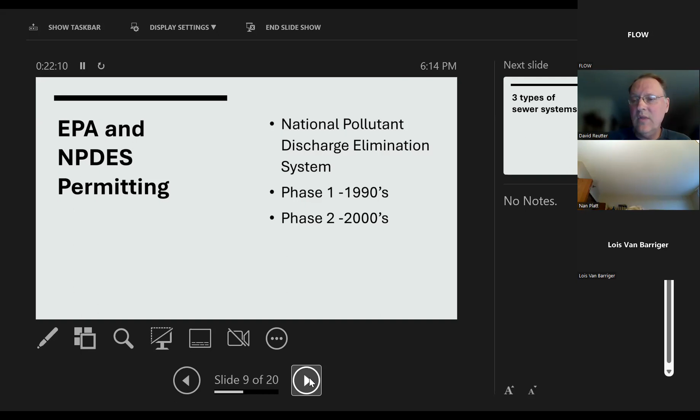Minimum control measures, like I said, there are 6 of them. You've got public education and outreach. You've got what's called IDDE, illicit discharge detection and elimination. Public participation. You've got construction and post-construction monitoring for any new development. And then there's MCM6, which is good housekeeping - for municipalities in how they run their own in-house systems. They want to be the model of good stormwater protection and prevention, and that's what 6 is all about.

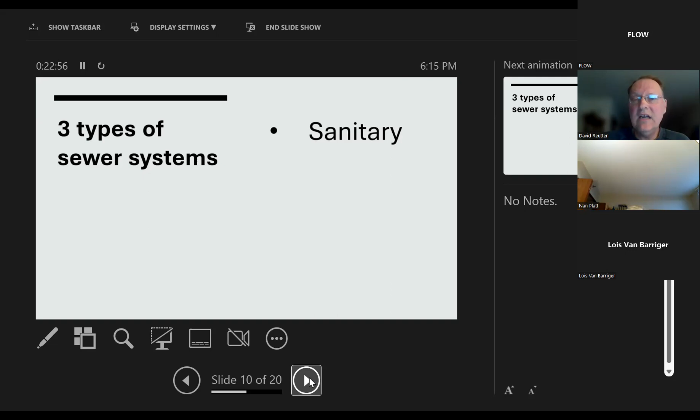So let's get into what types of sewer systems there are. You've got 3 different types. There's sanitary - when you think of sanitary, it's everything in the house that's piped out and going to the sanitary system, hopefully. That's something we oftentimes run into, is it's not going to the sanitary. You've got home septic treatment systems - most of those are hooked up to a septic field or a mound system, or they have discharging systems that discharge possibly to the MS4. So those sanitary systems are different than what we call the storm system.

Storm system is just what it sounds like. When there's a storm and rainfall and runoff, that's what flows into those storm systems and takes whatever it flushes with it directly to the streams, most likely. Only recently have we begun to do stormwater facilities that treat that - that's when you see the big stormwater ponds around development.

Not all ponds are stormwater related. Some of them are simply decorative. Some of them are dug for soil - they need the fill for the site, so they'll dig a hole and create a water feature and use that fill for the land. So not all ponds are storm related, but many of them are when you see new development go in these days. That's only been around since the 90s.

It was a suggestion to have stormwater controls. By the 2000s, it really was part of the construction permits to be doing stormwater control in some form.

Then we have combined systems, and it's just what it sounds like - sanitary and storm combined. This was something that with the NPDES permit in the phase 1 and 2 communities, the combined sewers were a big problem. This is where you see a lot of the older US cities having combined systems in some form, and all of these were given consent orders to meet the federal permit requirements. So you've seen a lot of big sewer projects around the country to try to stem this combined sewer system issue. Philadelphia has had big issues there because all of their old sewer systems go back to that Roman type of system.

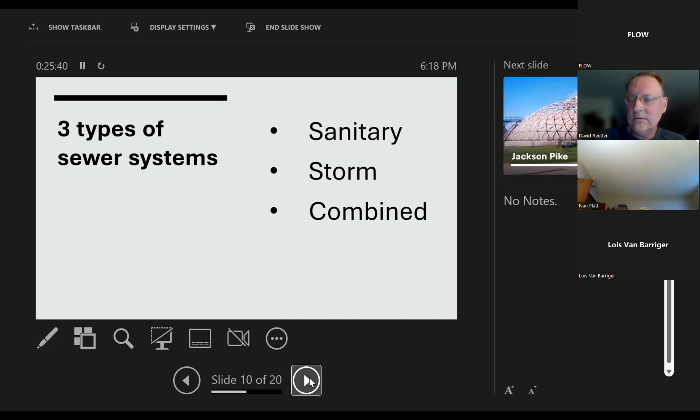Where you had a combined sewer pipe that took everything in the kitchen sink down to the river. So that is what you see in a lot of the older US cities and a lot of the consent orders out there for fixing that.

This is some of our local infrastructure. If you've been down Jackson Pike, just south of 104, you'll see these big tanks down there - these are the Jackson Pike digesters. If you think about the location of these systems, and this is true around the country, they're downstream. This is all gravity-fed sewer systems that end up, for us, south of town, because it's a gravity-fed system.

Jackson Pike handles mostly the west and northwest side of the city.

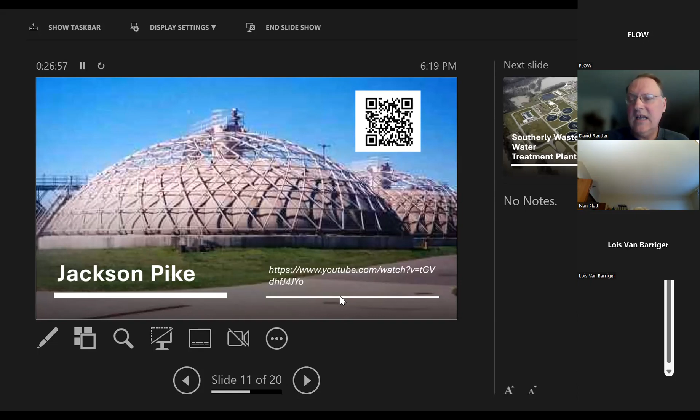If you're interested in Jackson Pike, they've got a great YouTube video on how it works. You can use that QR code with your phone and get there, or there's the website where you can take a look at the YouTube channel. It really will open your eyes on the level of sanitation required for big city sanitation facilities.

This is the Southerly Wastewater Treatment Plant, a little further south down the Scioto.

I really am intrigued by this picture. If you notice around it, there's water everywhere. This was flooding that occurred on the Scioto, which happens fairly regularly. Fortunately, our wastewater treatment plant does not get flooded in this case - access might be a little difficult during this time, but lots of flooding in other areas occurs at sanitation plants, and you see these plants go down because of flooding situations like this. That's been a big problem around the country, especially New Orleans has terrible problems with this.

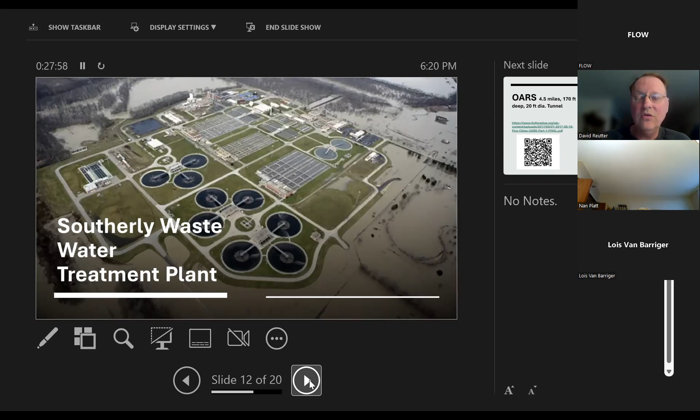A lot of communities, those plants are built in that low spot because of the fall - you need that gravity feed to get to the plant.

So some of the things that are happening, this was a big part of that consent order. Columbus has spent a lot of money on the fix. One of these is what's called the OARS tunnel - I forget what the acronym's for, but it's the Olentangy Interceptor.

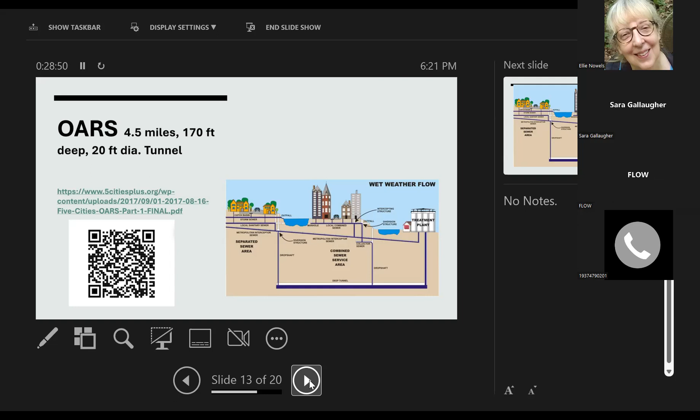This was a sewer outfall of the combined sewer that was discharging during very wet weather. What happens is you get stormwater mixing with the sanitary water, and it's too much for the treatment plant to handle, and it discharges to the streams. So that's the problem with the combined system. The idea is to separate those systems and do something about that discharge to our creeks and rivers.

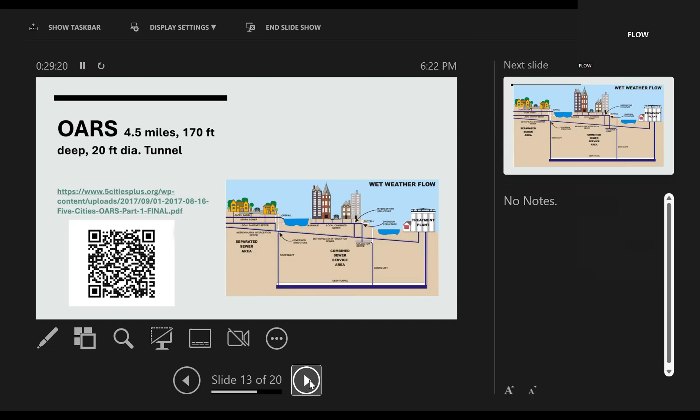Again, good presentation here on the OARS project. If you look at that diagram, the OARS is that deep tunnel on the bottom of the screen, 170 feet deep. It's a 20-foot diameter tunnel, 4.5 miles long. What that does is store that overage, that overflow of water, instead of going into the streams - it stores that in the tunnel until it's able to be treated at the treatment plant.

Dave, so a quick question - is that what's going on over by Olentangy River Road near OSU and Target, where they're shutting down lanes? Is that what they're digging, the deep water tunnel?

I am not sure. There's several shafts that access the tunnel, and I'm not sure where those locations are at. It may be, I'm just not sure - sorry, I can't answer that one. No worries, but there's several of these projects going on, and being 170 feet underground with a boring machine, you really don't even hardly notice them occurring, except at the construction site where these shafts are at.

A little bit better view of it. If you look at this graphic, you can see to the left you've got that separated sewer area - you've got a storm system that would outfall to the river, but then you also got that sanitary system that's going to the local interceptor. Remember, this is all gravity fed, so all of our creeks and streams around here likely have a sewer trunk running down next to them.

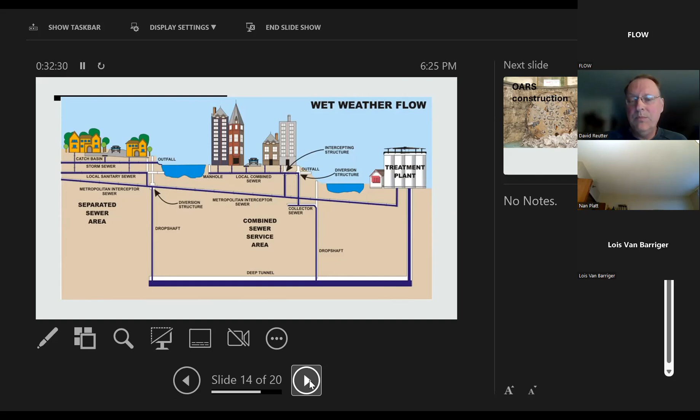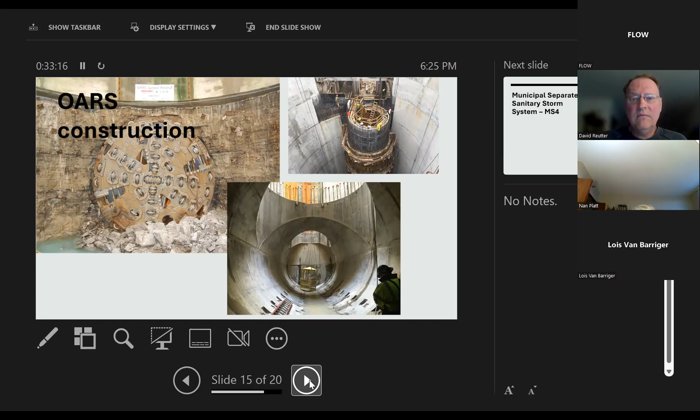Here's some pictures from the OARS construction. You can see that's the boring machine just coming into one of the tunnel openings. There's these enormous vertical tunnel shafts where the stormwater flows down into and fills up, and they can monitor that level as this pipe fills. Millions and millions of gallons. It's really quite an incredible project. I encourage you to dig more into it with that website, and I'll have this in the presentation so you guys can take a look at that later if you want to.

So here's what we call the MS4, Municipal Separate Storm Sewer System. This is kind of the idealized look at it. You have your household wastewater that's going to the sanitary sewer, which goes to the treatment plant. On the other side of that, you have the storm drain, where you do get that storm discharge. The runoff occurs, that stormwater goes directly to your waterways. So that, again, is the idealized picture. What we find is there's often cross connections there, or there's differences in how those are working.

We frequently talk about not putting things down the storm sewer - what things you can discharge and things you can't. Even things like pool discharge. People shutting down their pools this time of year, and they've got chlorinated water. What do they do with that? How do they get rid of it? Well, that's where we look at that change in behavior and try to say, first try to dechlorinate it, let it sit a while before you discharge it. Then in that sense, it could go down the storm drain.

Some municipalities don't even allow that discharge to go to the storm drain, because that system now is the public sewer system. That storm drain is what we call part of the MS4. Any discharge that's not stormwater going into that drain is actually an illicit discharge. So we do a lot of work looking at that. We do what's called dry weather screening throughout the year for communities, actually going to the MS4 outfalls to see what's coming out of them. If it's been dry for 2 days, there shouldn't be water coming out of some of these storm drains. So we backtrack and look up through the system to figure out what's making that discharge and whether it's an allowable discharge or not.

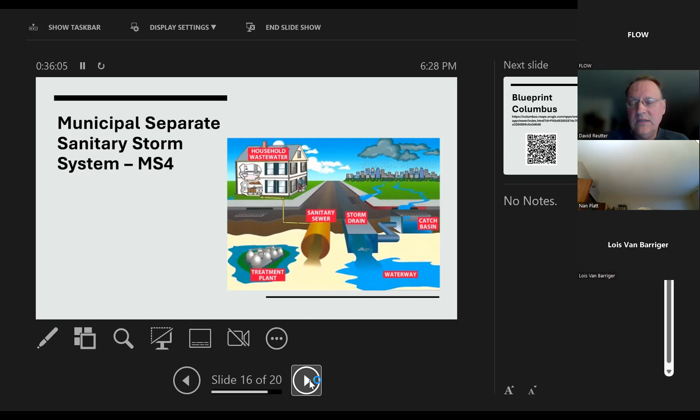Something that's a little bit different about Blueprint is what's called SSO. We have combined sewer overflows and we have sanitary sewer overflows. The sanitary sewer overflows are caused mostly by infiltration into the existing system. A lot of times those pipes are not watertight, or there's connections like you see here. A lot of roof drains are hooked to the sanitary lateral that goes out to the sanitary sewer system.

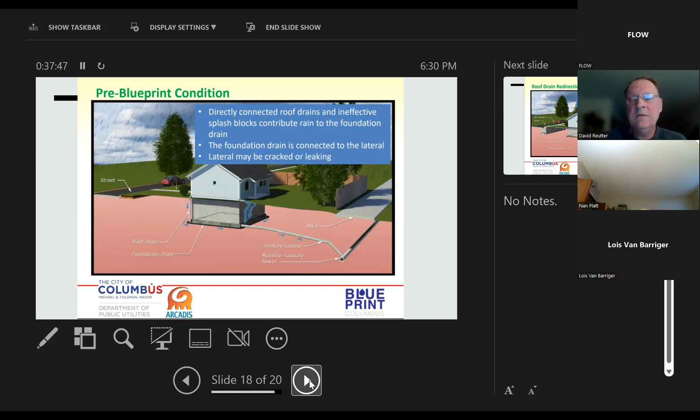Floor drains, sump pumps - most of that was pumped into the sanitary lateral. So when you get really wet weather and it comes down hard, you've got all those rooftops and groundwater pumps going, in addition to the sanitary needs of that system, and it's just too much for the undersized sanitary system. So Blueprint looked at that and changed it by lining that lateral.

Probably got some folks that have had that done at their house, where the lateral sewer line gets lined so that it's not intercepting any water. And those roof drains are getting moved back and out to the street.

A lot of rain gardens have been tried in Clintonville, that area - using that rainwater, that stormwater, in a way that's going to detain it or uptake it and slow it down to the streams. So it really is helping both the sanitary and the stormwater at the same time by doing something like this.

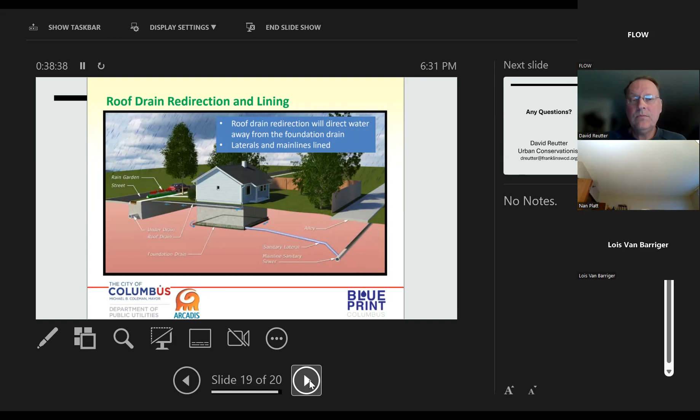I really went through that quick, and I'm hoping you've got questions for me. Like I said, my main background is looking at the storm side of things.

The things that we do now for stormwater really is green infrastructure - that's what we're pushing more and more these days. That's a way of getting infiltration, using the ground for infiltration purposes. Uptake - trees are a great thing to have for stormwater. When we do stormwater calculations for development sites, the one thing that we're comparing it to is forested areas, the pre-developed condition. What is that pre-developed condition? If you've got forested areas, that's the highest, best use of land when it comes to stormwater.

So that's the thing we should be going for. And part of that is green infrastructure design, trying to get those environmental services back into development to help with the stormwater. It's only going to get worse.

With the climate change we're seeing, the intensity of the storm events is getting greater and greater. It really hits hard and fast, and we have to have some resiliency to it. Otherwise, you're going to see some very negative impacts that we're already seeing quite a bit of now anyway.